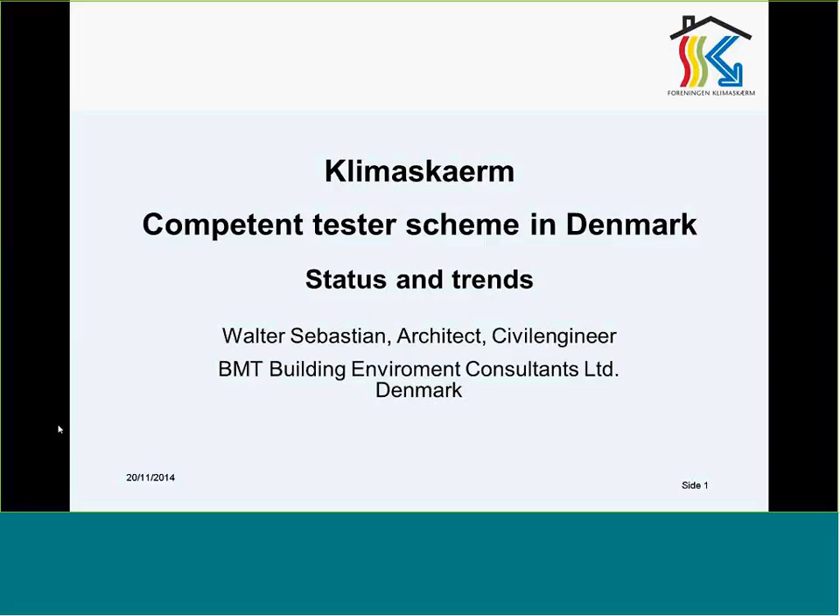I will give a presentation of how things are in Denmark. The presentation will be about what Klimaskaerm, our association, is doing to raise the quality of airtightness in Denmark. So what is Klimaskaerm? It's a Danish association for testing of building performances, and especially airtightness testing and measurement. The association is also a part for thermography. It's an independent non-profit association, and we have limited resources, so everybody is a member and fully voluntary.

It was founded in 2006, at the time when we had a lot of legislation on airtightness, and they're making the rules more stringent in the years coming. We have 50 member companies, everything from surveying companies, companies selling testing equipment or equipment suppliers and manufacturers, and also a couple of institutes.

The idea is to have a platform and a society for the testing of the building envelope with blower door or infrared camera in Denmark. And we are located at the Danish Construction Association in Copenhagen. If you want to see more about Klimaskaerm, and unfortunately most of it is in Danish, you can go to our homepage.

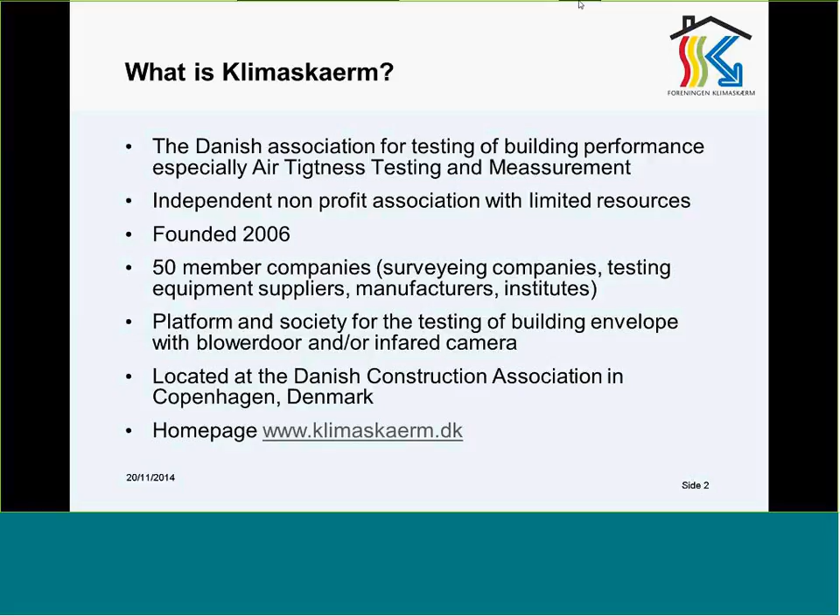The areas of interest are building performance, airtightness measurement and documentation, infrared measurements and interpretation and documentation, but also thermal performance of buildings, and then of course especially leakages in buildings. And one of the new things is quality assurance of testing.

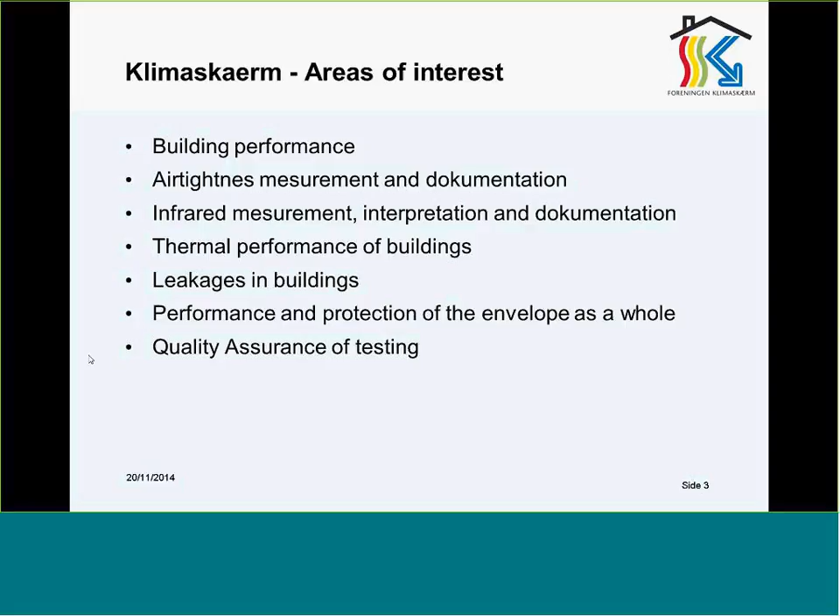The idea in Klimaskaerm is to give third-party information on building airtightness, and also to do seminars and training courses and a lot of education of testers. We also have member meetings where we can communicate experience regarding testing, and it's a forum for discussion and exchange of views. And we have a yearly conference. We also develop tools and guidelines for the administration of tests and quality assurance.

Our mission is to achieve and promote the highest standards of airtightness testing in Denmark, and at the same time become a platform for the testing procedure, the methodologies and information exchange. One of the main things is to undertake training of testers and to provide good practice testing and technical guidance.

One of the other important things is to give information regarding airtightness testing, for the public as well as contractors, consultants and designers. We believe that there's quite a job to do there. Not everybody is familiar with how to test and how to get high quality testing. And the association is also a platform for the registration and accumulation of airtightness data of buildings in Denmark.

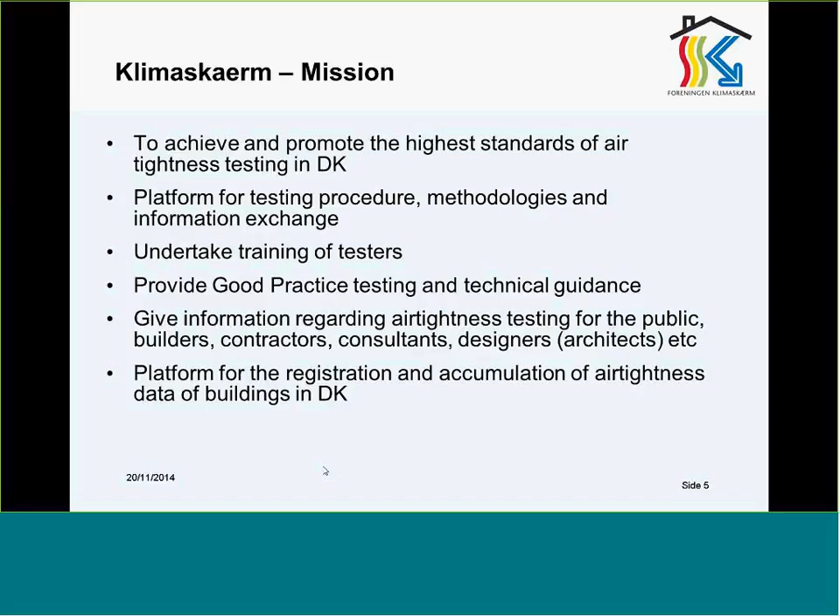So what have we done in 2014? We've made paradigms, guidelines for a quality assurance manual for the surveyor company. And we have prepared paradigms for testing with blower door in compliance with the standards, for 3 types of buildings: small buildings, large buildings, that's buildings over 1,000 square meters, and passive houses. We have also made a paradigm for the local authority on how to handle tested building airtightness and reports.

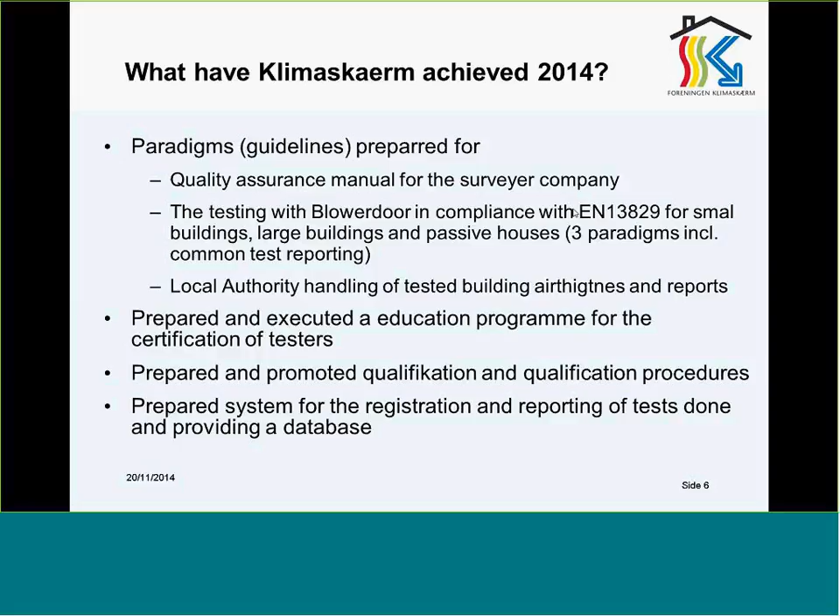We have prepared and executed the education program for the certification of testers, which involves a 2-day education and also a multiple choice test. And we have prepared and promoted qualification procedures. This is followed up by a system for the registration and reporting of tests, and we have arranged for a database, which we hope will be the place for everybody to put in their data for airtightness of buildings.

One of the things we've done is to make a certification of air testers, and our certification of airtightness testing is possible through what is known as Byggeriets Kvalitetskontrol, the Danish standard certification. And to do that, to become a certified leakage tester, the company needs to establish a quality system, a manual, specific for the testing in accordance with the standard.

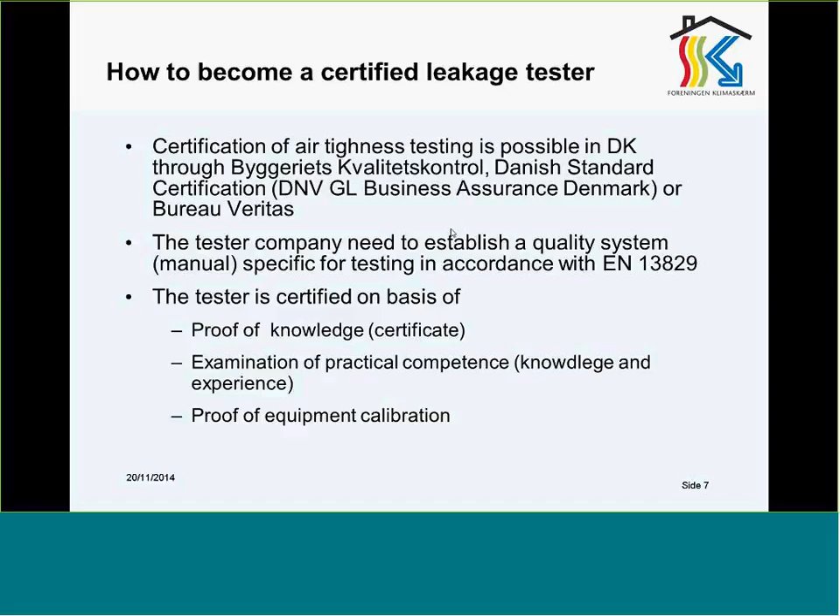And the tester will be certified on the basis of 3 things: proof of knowledge, that's a certificate, examination of practical competence, that's both knowledge and experience, and proof of equipment calibration.

I mentioned before Byggeriets Kvalitetskontrol. That's a Danish word for the quality assurance and certification for building construction in Denmark. They certify businesses within the Danish building and construction sector, and the certification is conducted in accordance with either an ISO standard or Danish national regulation and encompasses authorisations, voluntary quality schemes, and schemes for energy marking or review reports. And this is where the airtightness test comes in.

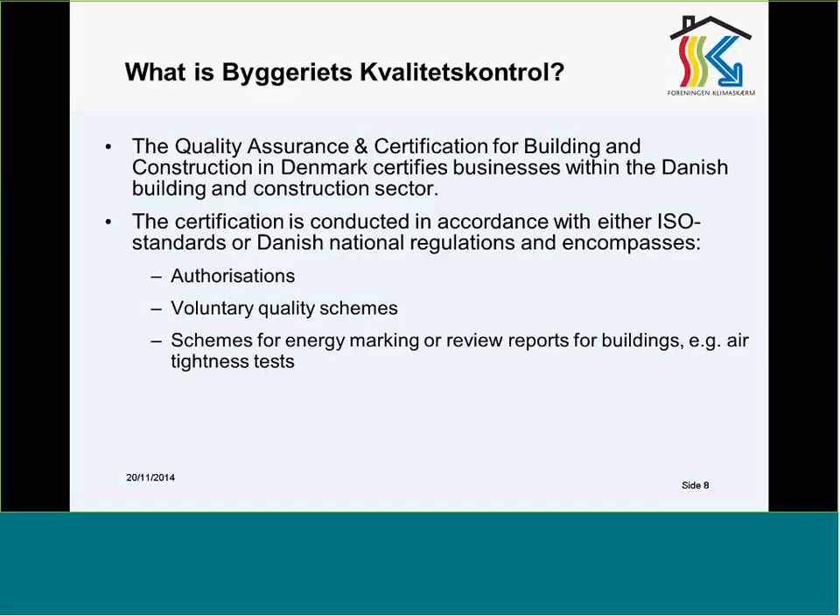The certification process. The first thing you have to do is the company has to contact the accredited auditor and enter a written certification agreement. And they have to prepare a quality assurance system, which is targeted for certification of airtightness testers in accordance with the standard. And when they have prepared the quality assurance system, the company will submit the system to the auditor, and the auditor will then evaluate the company's quality assurance system, and when appropriate, they will do an audit of the company.

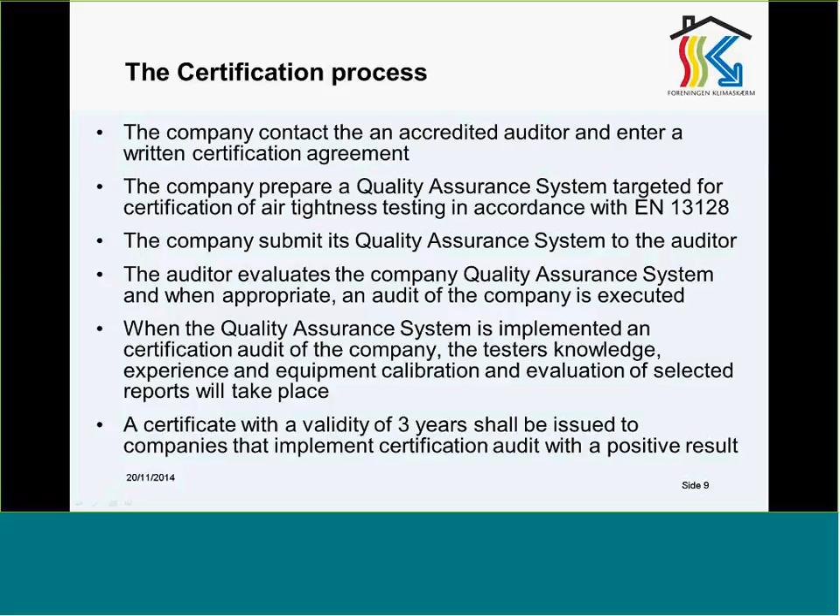When the system is implemented, a certification audit of the company and the tester's knowledge, experience and equipment calibration, and an evaluation of the selected reports will take place. And then you are certified. And a certificate with a validity of 3 years is issued. And that's, of course, if you have a positive result, or else you won't get certified.

The surveillance audit and recertification, which is necessary, that's within the next 2 years. There will be conducted a surveillance audit of the company, and it will take place in intervals of 12 months. And after 3 years, you have to get a full recertification of the company. This certification is voluntary, and therefore not mandatory in the Danish building regulation. We are hoping that the authorities here will help us get the builders to use testers from the association, and with doing so, they will get a higher quality.

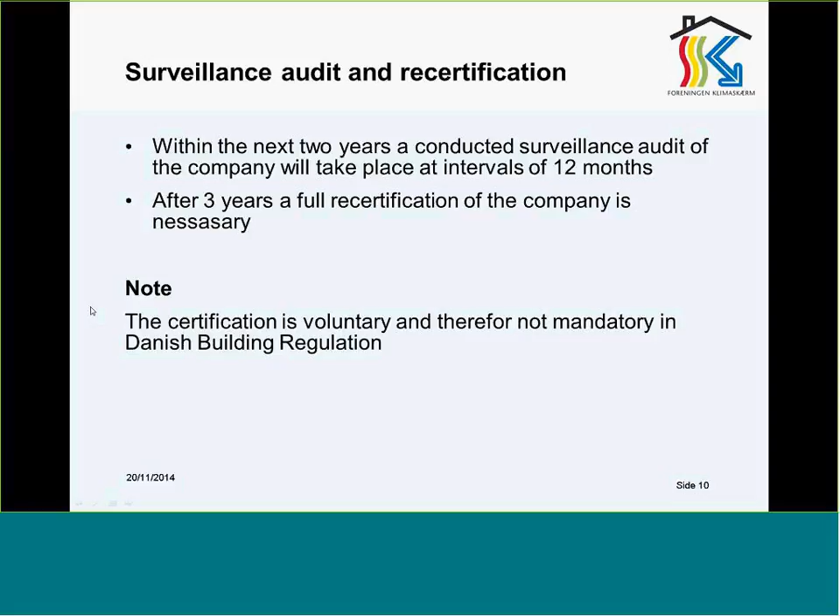I mentioned before that we do training of testers, and this is the key to get high quality. That's at least what we believe. And to become a certified tester, you must attend a 2-day intensive course. You have to, during these 2 days, understand the theoretical background of airtightness and building performance, and of course testing.

And when you've gone through these, you need to pass a multiple choice test to prove that you understand everything about airtightness. And you also have to do a practical test to prove your ability to perform a test in the right way and to handle the equipment for testing. A tester must attend a recertification course and pass a new multiple choice test every 3 years. So it's not only for the company, but it's also for the testers.

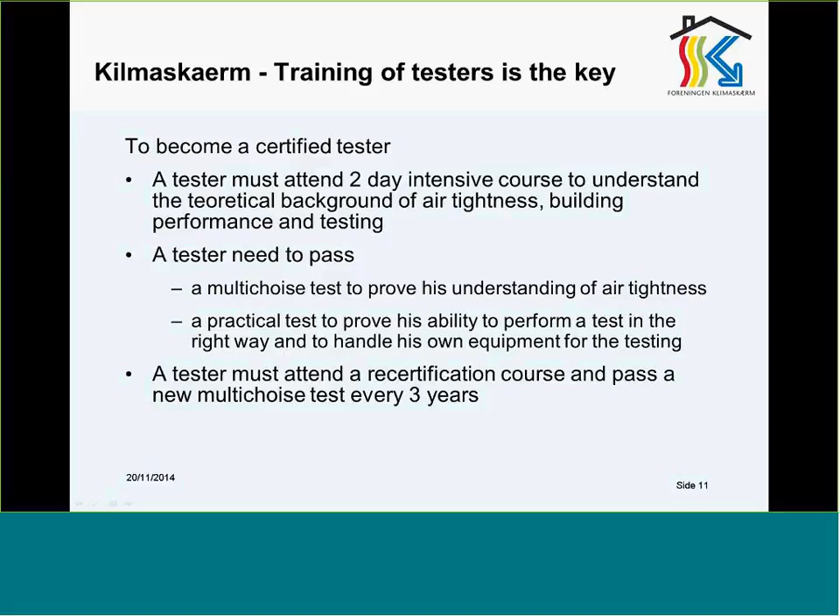Status. We have established paradigms to support the standards. We've prepared courses and executed them with great success. Actually, 30 of 50 members have by now attended the basic courses, and 10 members have been audited and are certified by a third party, for instance, the Quality Assurance and Certification for Building and Construction in Denmark.

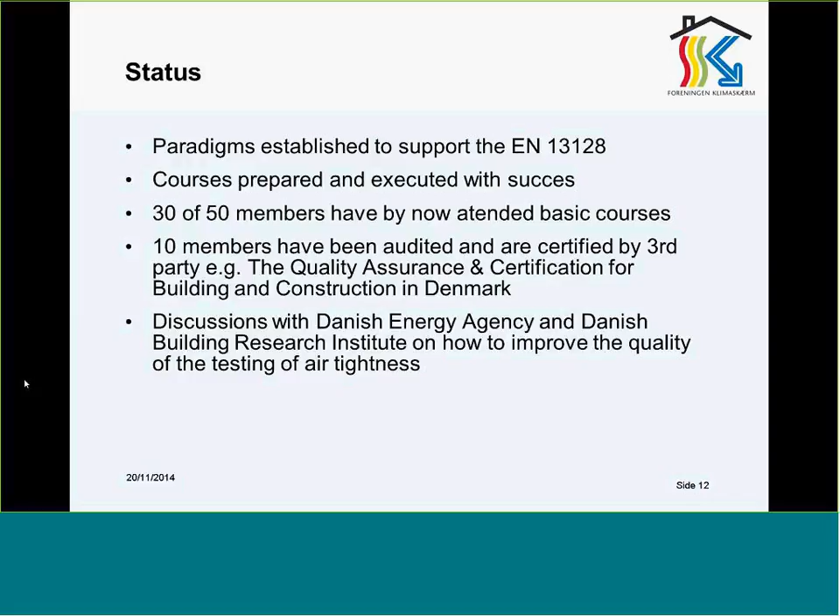And at the moment, we're having discussions with the Danish Energy Agency and Danish Building Research Institute on how to improve the quality of the testing of airtightness. That's also to improve the quality of testing for companies and testers which are not certified. That's all for Denmark.